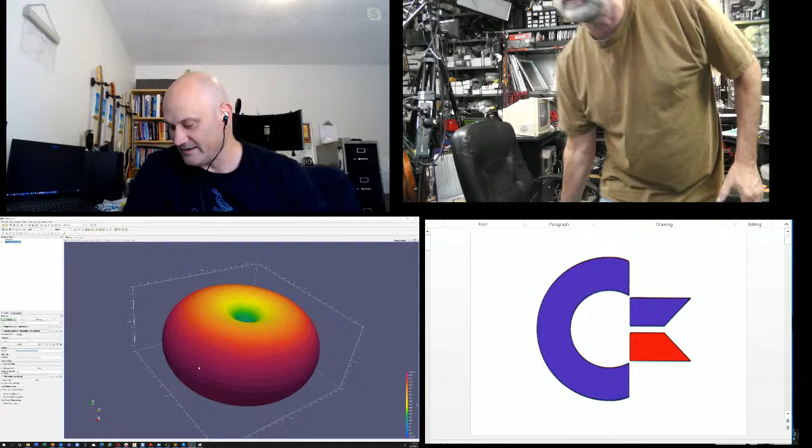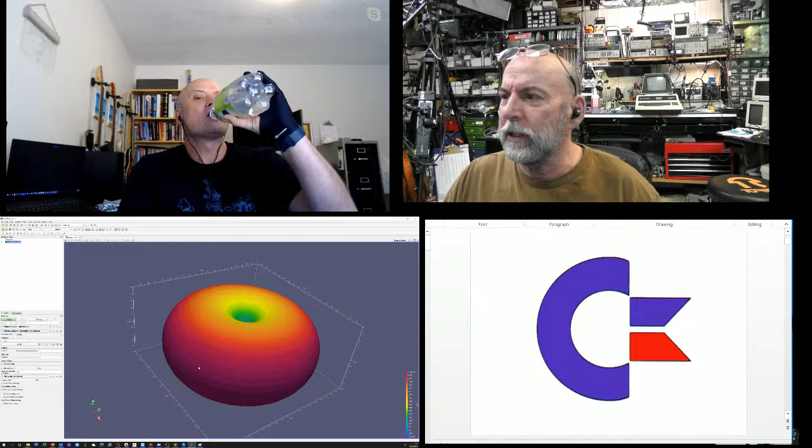Right. I'm trying to remember. They got purchased by Analog Devices, didn't they? Yes, Linear Tech was acquired by Analog. So basically the two biggest, and National was already bought out by TI. We used to have this huge choice of analog sources, and now it's TI or Analog Devices. That's the way industry goes. But Microchip are also one of the big ones on consolidation, and they've been acquiring a few smaller power and other analog ones like Micrel.

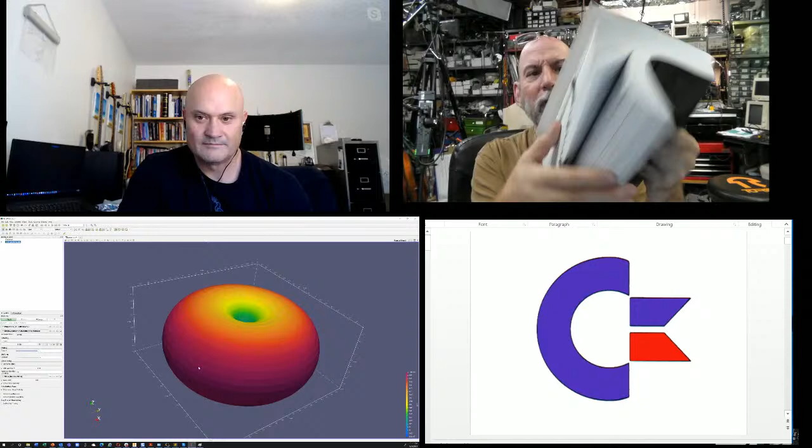So this is Precision Monolithics, PMI. Back in the 70s and 80s, this is what I designed out of to make load cell amplifiers. And look how much information comes with it. This is how I learned analog, reading these things almost cover to cover. And so this book is useless to me, and yet I don't want to throw it away just yet.

Was that back in the days when data sheets were honest? Data sheets came in data books, yeah. And you paid for them. You couldn't just get them for free. I got these for free, but I would tell the distributor to just pull up. They'd show up and their car would be riding low, and they would move their golf clubs and just unload all the data books on me.

So I still have about 600 data books in here. Well, they did that for you, Bill, because you worked for a company buying millions of parts. But if you were just a standalone engineer inventing stuff like me, you had to pull teeth to get data books. I remember wanting to get Philips microcontroller data books for the MCS 51 and MCS 48 derivatives, 8051 and 8048 derivatives.

This was in the 90s when this information started to become available online, but it was still very limited. I couldn't go to philips.com and download every data sheet, they hadn't migrated them all yet. All these companies needed to go through a massive republishing where they put it all in PDF. And the data I wanted was still sold in books, you had to buy them from the distributor. The distributor, if you were buying millions of parts, they would give them to you. But I wasn't.

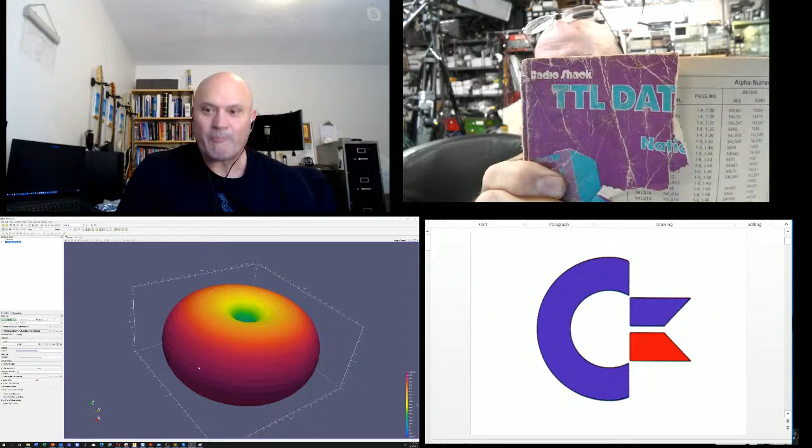Hang on a second. So here's a data book. It's missing its cover, but I bought it. Look where I bought it from - Radio Shack. This is from 1973 or so, and it's the National TTL data book, back when they had pictures on the covers.

Yeah, it looks very well used. It is, and it's written on parchment - you can see the paper's all brown. I have books like that too, my transistor lookup tables, all the standard transistor numbers.

And we would buy books from Dick Smith Electronics in Australia when it was still actually an electronics store. We all lament the acquisition of Dick Smith by Woolworths because we knew it was just going to turn to boring things, and it did.

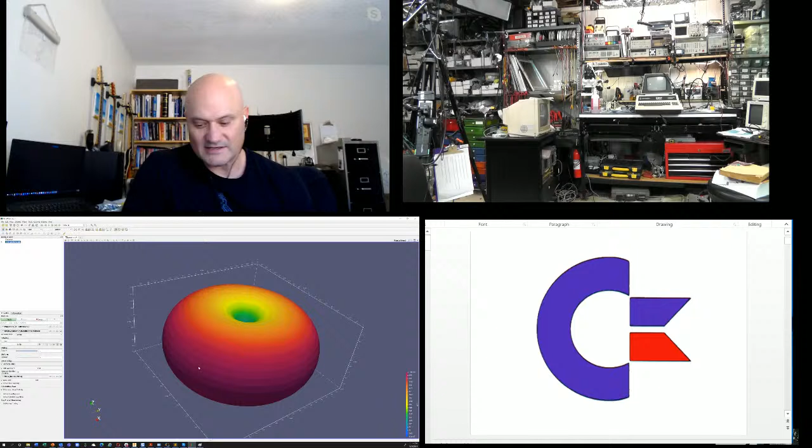But they had, and I'm sure you had them here, Radio Shack had them as well, the transistor equivalency tables. If you needed to replace a part, if you're troubleshooting, it was always on your desk. Oh, this obscure Japanese JFET is not available here, so yeah.

So I have a 3-ring binder of all the transistor lookups. For example, you just saw the RCA series, where they would translate everything to an SK device. So if you needed one, SKs were made by Toshiba in Japan. Here, this was the ECG series - remember that? I was always translating to ECG.

Other than live streaming and novelty, do you ever refer to any of these anymore? No, no. Because I use the internet, right? Of course - this was the internet back then.

Matter of fact, it's even got the old Dymo tape thing on here to tell me which. And then I have another 3-ring binder full of line cards, so that I knew who to go to for each different brand of things.

So, but no, it's funny you mentioned that. I lived and died because I got my start as a kid. There was no maker movement or anything, I fixed things. And to fix things generally meant replacing a transistor, especially audio. So I would get my 2N3054s from Radio Shack for the outputs, those were real common. But if I needed a Class A amplifier or something, I'd end up almost always getting an ECG part or an RCA SK part.

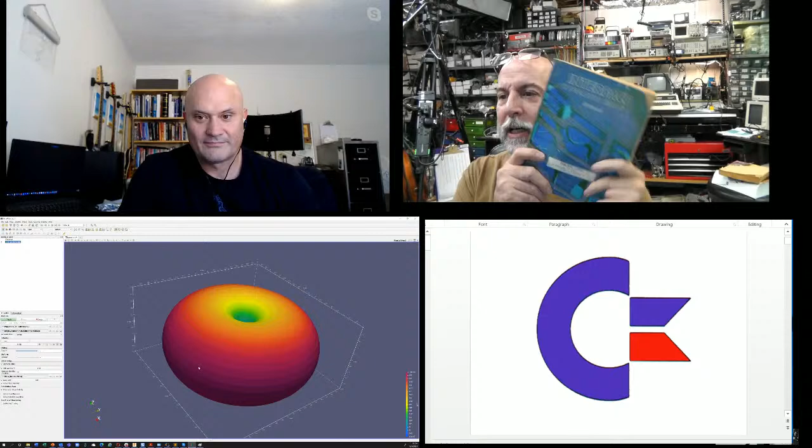I needed to know which of my dozens and dozens and hundreds of data books had the information in it. By the way, there's another National data book with a picture on the cover. But you had to remember where it was. So even when I went on vacation, I would load every nook in the car with data books, and I'd sit there flipping through the pages, just refreshing my memory as to where I'd seen things before. Because it was all about going, that's in a Burr Brown book.

Yeah, what does that tell us when we go on vacation and read data sheets? Oh, I loved it. It told me that I was self-taught, and I worked my way into Commodore by doing stuff like that. Yeah, you did. So I wanted to see what year this one was - 1975 this one came out. So it's 1 year younger than me, Bill.

And not even, because I was born at the end of '74. Anyway, wow, let's see what's going on. They're talking in the chat room.

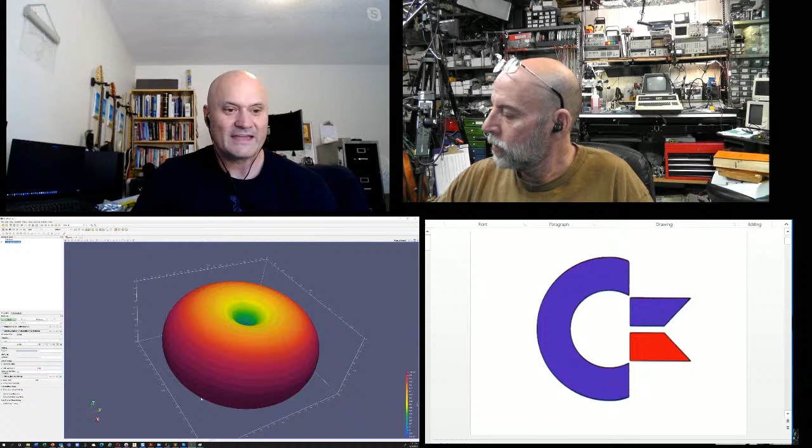OpenEMS uses the Visualization Toolkit, or VTK, and this program you're looking at here is the VTK GUI called ParaView. It's extremely hard to learn, it has too many features - and the reason is it can do anything. It's not just for electromagnetics, it's for any kind of scientific visualization and animation. I really need to spend some time to dive into that and maybe do some dedicated tutorials on YouTube for using this with electromagnetics, because it's quite complicated with all the options.

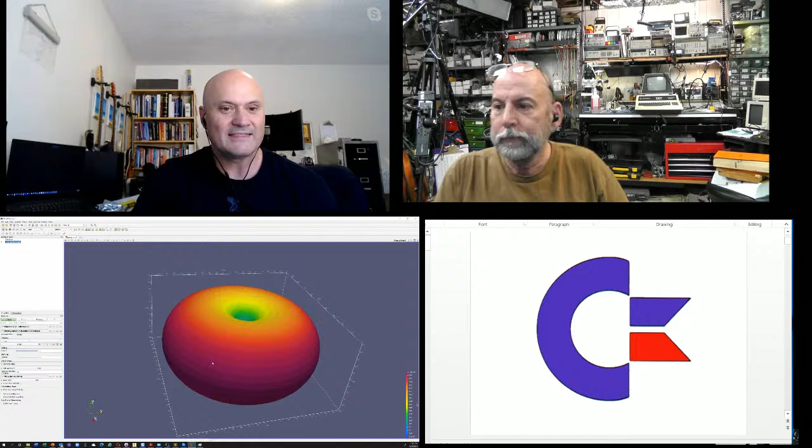But I can get the far-field pattern generated by OpenEMS through the Octave script, running OpenEMS from there, and as an output it generates field patterns and other graphs you can generate as well. I noticed there was a recent update to OpenEMS and to VTK, so I was updating it all and just running one of the basic examples to check that it works.

So what that looks like - normally you start out here in Octave or MATLAB. This one's already generated these graphs, and they didn't come out too good, which probably doesn't matter, but I'll show one of these examples. I've got the editor configured to be my Sublime Text, so here's the infinitesimal dipole script in MATLAB code. I don't know if you can read that text - I'm doing this on my 4K monitor, so forgive me. But basically you just set it up, we're clearing the memory and everything.

Physical constants is just loading an array for storing physical constants, things like drawing units, micrometers. We set up some basic paths and everything. This loading physical constants command executes a separate script that comes with OpenEMS, loading up things like the speed of light, the resistivity of copper, dielectric properties of various materials, and so on, which we refer to throughout the script.

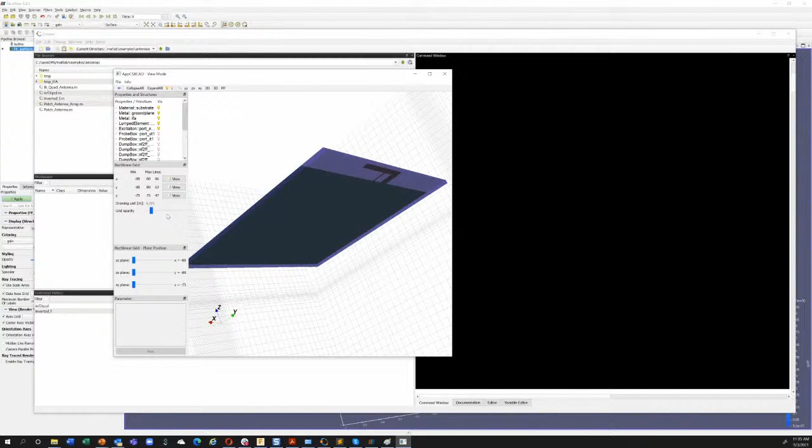And then it opens this other app that comes with OpenEMS that allows you to visualize it. So this is really just a tool for checking what you've written in the MATLAB code or Octave code and visualizing it, just a quick sanity check. Does this look real? But it also shows you, and this is one of the strengths of FDTD, the gridding into a voxel mesh.

So this creates a 3D voxel mesh in the box, and you'll see that where the objects get smaller and more detail is needed, it actually increases the mesh density, or you could say reduces the size of each voxel layer so that you get more accurate simulation. So you can have variable sized mesh in FDTD simulation. Got it. I can exit this, or I could export this if I wanted to.

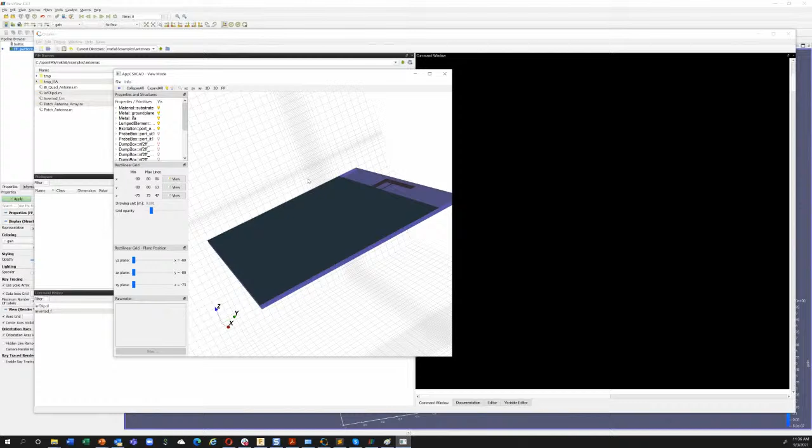Now is the darker blue a ground plane covering up part of the antenna? The semi-transparent blue is the substrate, which is PCB material, FR4, and the teal color is ground plane.

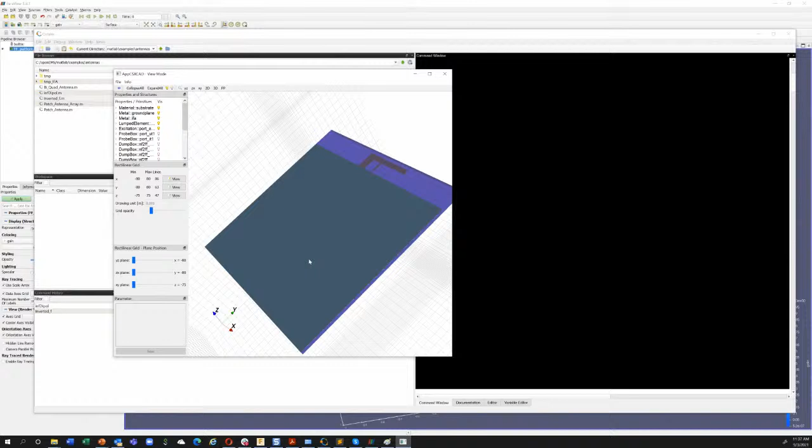Okay. Now, with an antenna, especially a PCB antenna... with a wire antenna, you could do a dipole. You always have two conductors that are driven out of phase, or one of them is a reference for the other one to radiate from. And that's a very, very coarse way of saying it. But for a PCB antenna, you always need some kind of ground reference; it's established that you won't get radiation if you don't have a ground reference. That's like, this is the ground, and the antenna is the thing apart from the ground, and the two together create the radiation.

I used to hang around a radio station when I was young, and it was something like 5 kW effective radiated power. But we were near a river, which improved our ground coupling, and so we were measured as an effective radiated power equivalent to about 20 kW, is my memory. So it was not a magnitude, but it was a huge amount more because of our ground coupling. And I just always remembered that meant that radio signals travel as much through the ground reference as they do through the airwaves.

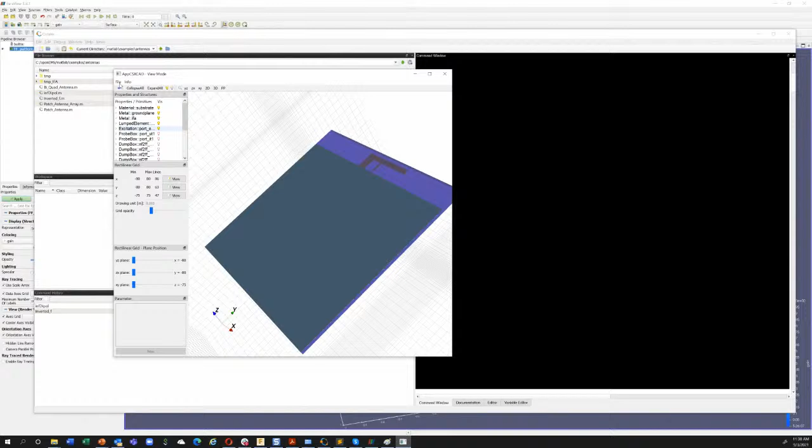Well, it's not even that so much as, to cause radiation, you need charges to be moving, and they need to move in opposition to each other. Right. So in a dipole, you have two quarter wave sticks end to end. So you have a whole half wave. Half wave, right. And you're moving charge out of one up to the other. So you're jiggling electrons up and down the post.

But to do that, you have a drive point in the middle and a differential line, and you're pushing one stick positive while the other's getting pulled negative. And so the current of those is in phase, but the voltage is, well, this one's going positive, this one's going negative, and then it reverses and goes the other way. And you have to have that charge movement and current in order to radiate.

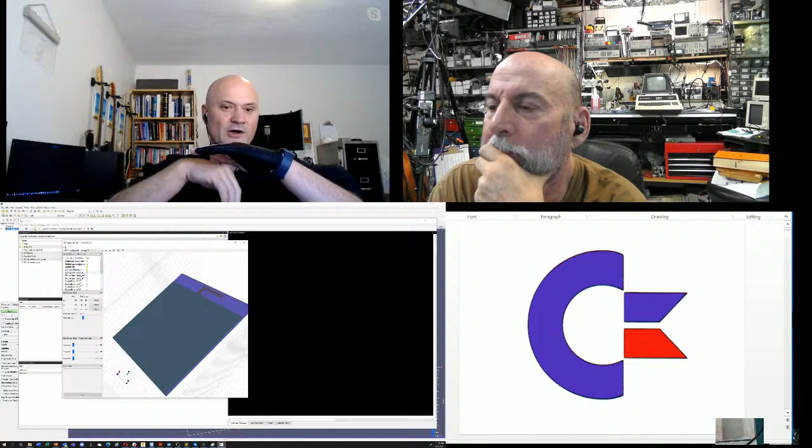And in a monopole antenna, it's a quarter wavelength stick. Right. But instead of having the other stick of the dipole, you have a ground plane be the other half of the wave, right? Because it has this reflective or mirror-like property. It gives you a virtual other opposing quarter wave stick. So you always have a radiator and a ground plane, and it's no different in a PCB. And in this case, we fold the radiator over, and part of the ground plane forms a reflective surface that even gives you a stronger signal in a certain direction.

So let's exit that, and the script keeps running. And now you can see in our output folder, it's generating all these outputs. Here it is. So it's actually executing OpenEMS across multiple cores. And it has this kind of criteria where it keeps looping through the system until the energy in the system has dissipated below a certain level.

And that can be a problem with the FDTD algorithm. One of the drawbacks is if you don't have perfectly matched boundaries, or if you have a structure in your simulation that's very reflective and energy can keep going back and forth for a very long time or forever, your simulation may never end. So you have to have something in your FDTD algorithm that says, you know what, this has been going too long, we're just going to stop.

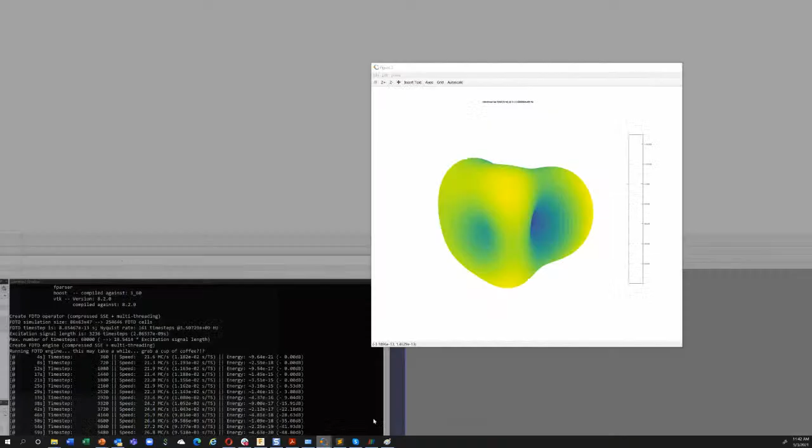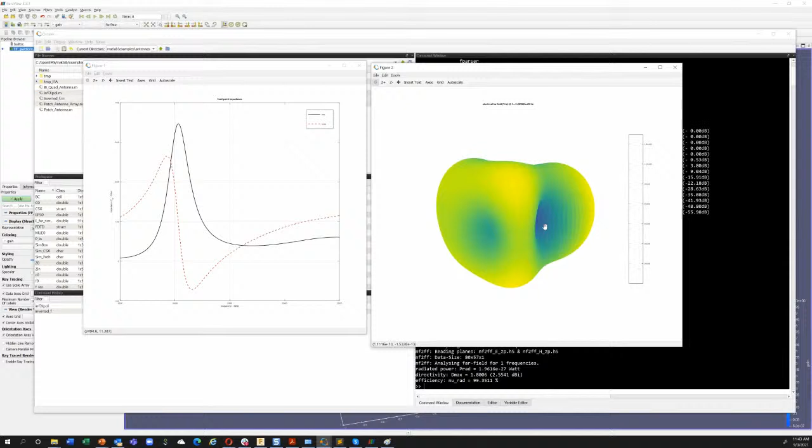Unfortunately, what I don't like is it doesn't overlay the field plot transparently with the actual antenna geometry. Right. I want to see them both to really know, or at least see an XYZ coordinate marker. I've got to figure out how to add that in the Octave scripting. I'm pretty sure it should be possible, but I'd like to see this overlaid with the actual geometry. But I can probably do that in ParaView.

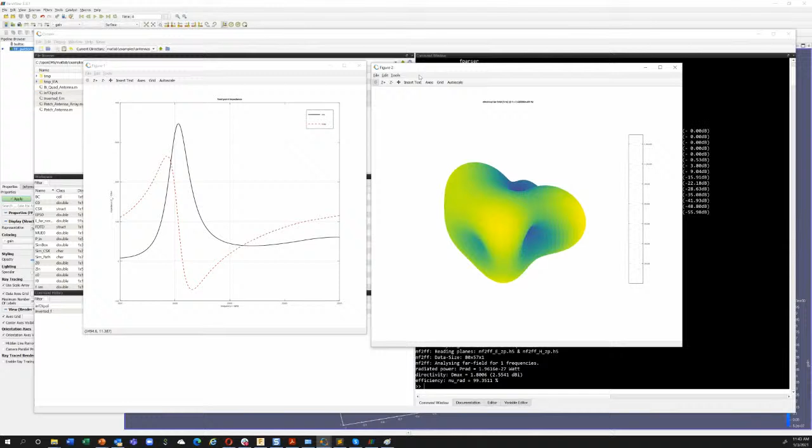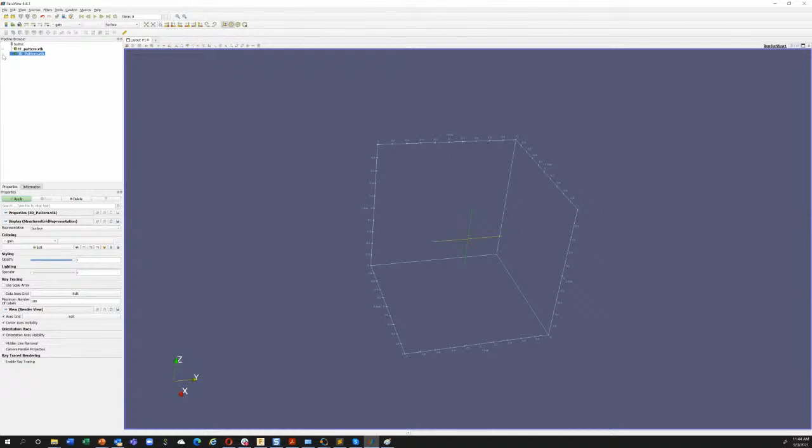Let's see if this one's loadable in ParaView as well. Let me open. I go up one directory. I go IFA. Here it is, 3D pattern VTK. Let's hide that one and display this one. Yeah, so ParaView shows me the XYZ axis. So because I know it's all keeping the same XYZ, I can figure out from that what's my direction on the actual printed circuit board. So I just have to join those dots in my head.

But this is pretty darn awesome for open source. Like, it's hard to use, I get it. But almost every electrical engineer, I think modern graduates, millennials, they know some scripting. Yeah. Most millennials probably haven't used MATLAB. Most of them have probably switched over now to Python. So they might prefer using MEEP. But I don't see why someone couldn't write the exact same thing in Python for OpenEMS. It's just a command line executable that runs, and you pass it an XML file.

Now, here's something interesting I discovered when I was fooling around with, what's it called? Qucs Studio. We've mentioned this on a stream before, and I've played with Qucs Studio before on a stream. But look at this; it's got some Octave stuff embedded in it. It even comes with GNU plot, and the Octave executable, a version of that, is inside the installation of Qucs Studio. So obviously Qucs Studio has some capability to do some Octave stuff behind the scenes. I haven't dived into it, but you can actually execute Octave scripts as part of your simulation model.

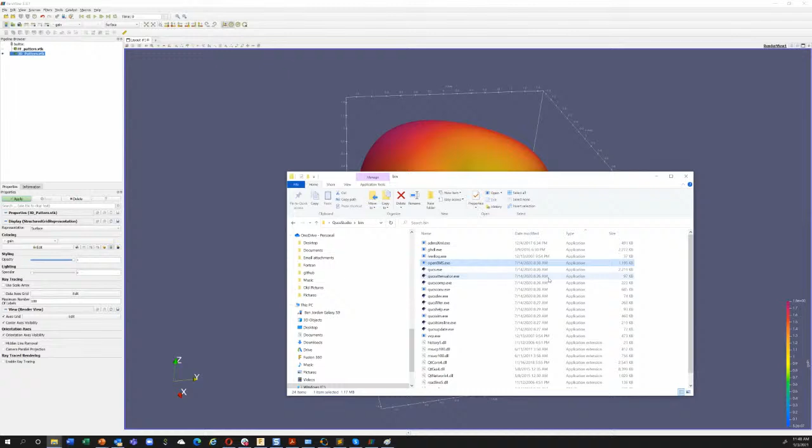You can do it that way, or usually there's a source and a perfectly matched layer bounding box, which is the simplest way to do it. Or you can do a source at each end, which is how most of the professional grade RF simulation tools do it, like HFSS. If it's an antenna, you have one port for an antenna in HFSS. But if you're simulating a transmission line, you put a port at each end, and in your own mind you use one as the origin and the other as the destination. They're both ports and both emit power into the system to generate accurate wave responses.

So, and you think about that, you have to have that in RF simulation, because that's how the software is able to simulate reflection. Right. And so you could do 4 ports in and simulate crosstalk, then, I assume. Yes. Very cool. Yeah. So and this is in lieu of hugely expensive software. This software, ANSYS and software like that, Keysight, whatever, can be hugely expensive.

Yes, they are. But I will tell you this very confidently: I've used ANSYS. They're better. There's a reason why they're expensive. It's because they've invested huge amounts of money and time into building them to be excellent, and it's not just about being accurate. It's about being actually easy to use and very productive. And B, the number of people in the world who need software like this is a very small portion of the overall population. So the return on investment naturally has to be there.

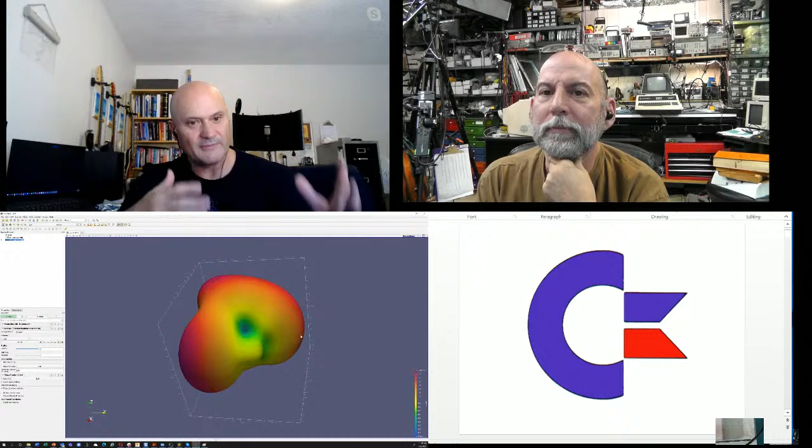But if you can't, then this is not a bad way to start. You'll be frustrated. It's slow. It takes time and effort to set everything up, but it does work. And it's for something that doesn't cost anything, that someone did in their spare time out of the goodness of their heart for all of us. It's actually pretty amazing what the results can be.

Right. Very cool. It's hard to describe it. So yeah, that's what I've been. One of the many things you've been working on. Well, I haven't really. I just brought it up before we started streaming because I thought it would be interesting for us to talk about it. Yeah. Oh, it was. I loved it. So, any comments on any of this? I'm just curious on the Discord. I don't have it open right this second.

Someone says ANSYS has a student license for electronic simulators, but it's quite limited. Ellie Fidesz said that. Okay. Well, I'm not a student, so I can't get that. I know that AWR, which used to be owned by National Instruments and they sold it off to Cadence, had a free version for licensed radio ham operators. And I think as soon as Cadence acquired AWR, they nixed it. Because I went and had a look on the website and I could find no information about getting it for free as a licensed ham operator.

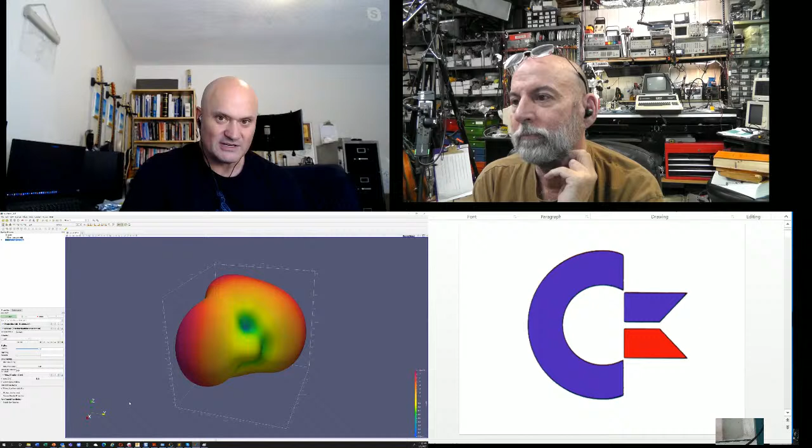Right. And another comment was Mike Fikes had said, yeah, MATLAB and Octave can do complex matrices. That was when you were talking about the complex matrix interfaces and stuff. Octave is extremely mature and powerful, and it is more than 80% compatible with MATLAB code. And there's even a whole lot of toolboxes that people have written for Octave that mirror MATLAB toolboxes. Some of those become a bit more divergent, but for the most part, it's extremely powerful. And if you ever used MATLAB in college, you can use Octave. But of course, if you're a professional engineer working for a company that has a tools budget, you could probably get the MATLAB. Right. So very cool.

Well, thank you for showing all that. Boy, that one drawing looks almost obscene the way it's facing us, though. Here, there you go. Yeah, it's like a pinch. What does it make me think of? Like those squishies we used to give away at trade show booths for stress relief, made of that closed cell foam, and you just squish them real hard, and then they gradually open back out again.

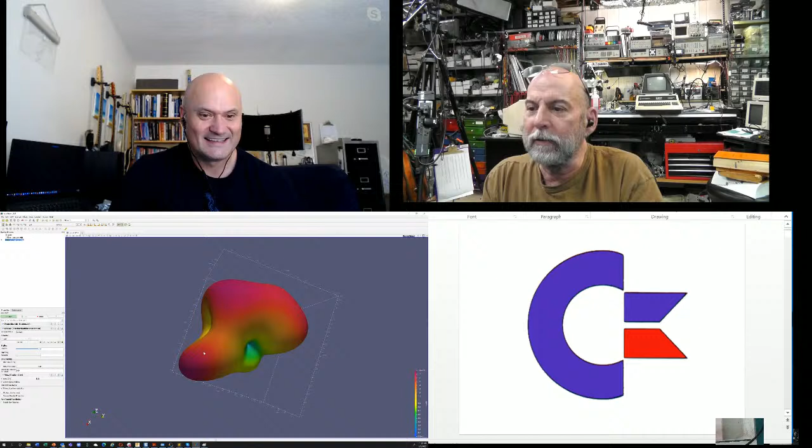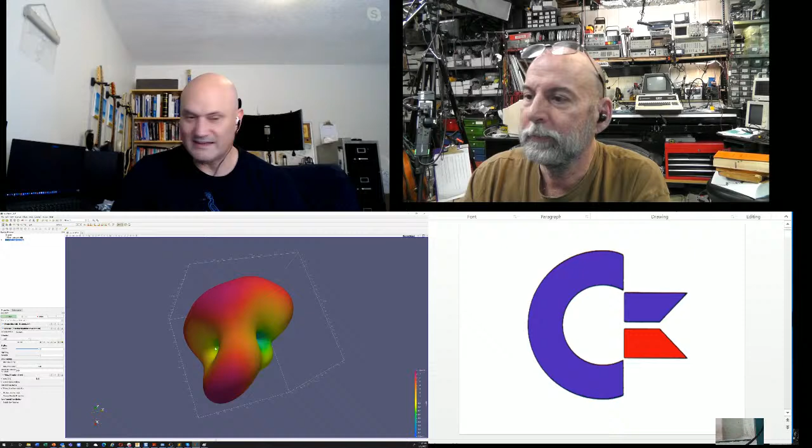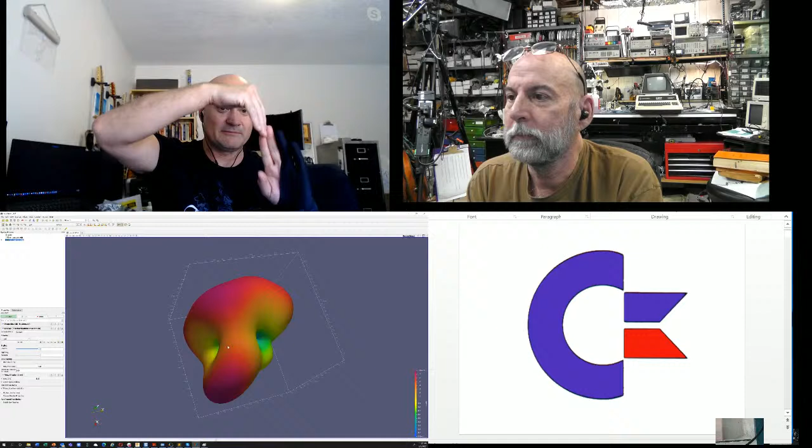Well, I would not have guessed that was the radiation pattern of a meandering F antenna. So I learned something today about that. Yeah, and the reason is that these nodes where there's basically zero signal is where either you're facing more into the ground plane, or you're facing into the grounded end of the matching inductor portion of the F. The top of the F connects to the ground plane and forms a loop which gives an inductance that makes the radiating arm more resonant at the frequency that you want it at. So yeah, makes it electrically longer, you could say.

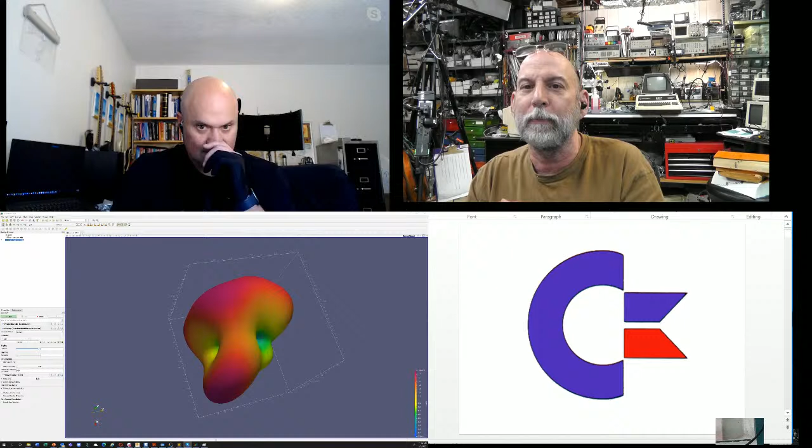So you were talking about Python, and I was going to say I have a story. Before we went live, I was talking about Terry Ryan, who wrote the BASIC that was used in the Commodore 128. Terry's background was he made BASIC structured. He had loop while, loop until, do while, all these commands, and he got in trouble for doing it. The boss literally said, while it turns out you were right to include these commands, nonetheless, you went against my wishes, so therefore no big raise for you. So this is how life treats Terry Ryan, right?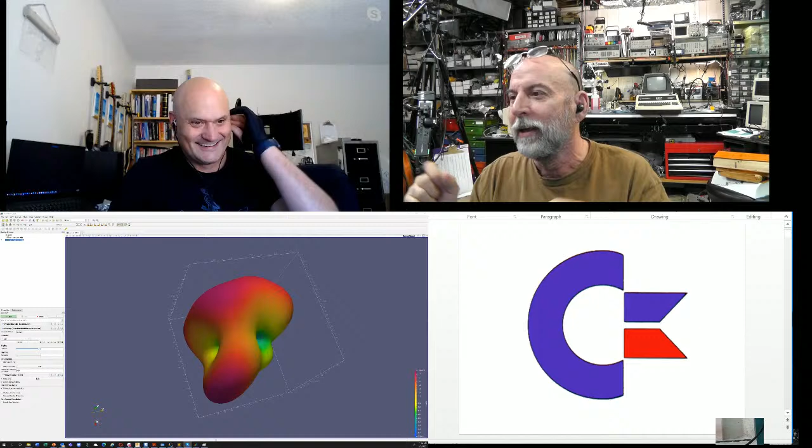So I asked him one time about Python, because you mentioned Python. I'm like, Terry, what do you think of Python? And he gets quiet, and he goes, white space has value, man. I'm like, what? He's like, it matters. You have to use a tab or a space. It means something. They used white spaces as syntax. Which is funny because he'd spent half his life making white space mean nothing at all, right? And it reminded me of the old Cheech and Chong album where he's kicking the piano, man. White space means something. Yeah, I think that would trap me too. I would find that very frustrating.

Well, the only time I had to use white space was, I started an ISP and ran it for 15 years, and I used SendMail. And SendMail's syntax literally needs a tab. If you have 5 spaces instead of a tab, it doesn't mean the same thing. When it didn't work, you had to go through and find out if something that didn't look like a tab was a tab or wasn't when it should have been. And you're using VI editors and stuff. Oh my God, yeah. Pain.

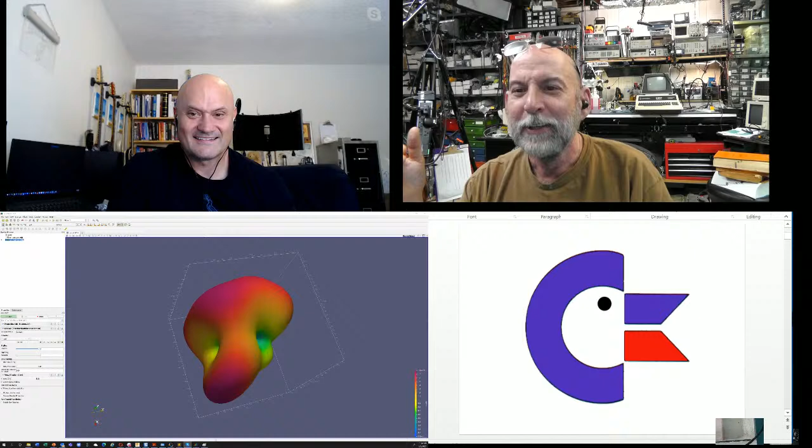By the way, I was watching Marvel movie outtakes, and there was that scene where they tell Dr. Banner, 'Hey, you'll like it, Doc, we have all the toys.' In the unused scene, he says, 'What, like a Commodore 64?' So the Commodore 64 almost made it into the Marvel movies, but it didn't. I love it - the reason it didn't is because Commodore isn't around anymore.

The chicken has died, as we say - the chicken can no longer sponsor the movie. I love that with the Plus, though. Well, I had somebody tell me - he literally screamed on the chat channel - he said, 'I can't unsee that now that I've seen it,' the Commodore logo.

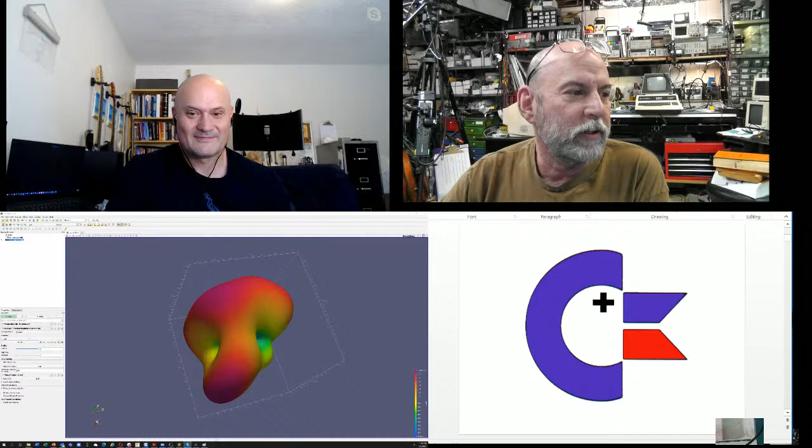I was actually going to show from my trip inside of MOS that I took 3 years ago, actually longer now. It looks very dangerous in there, leaks everywhere, water - yeah, it was cool, little campfires and stuff, bad chemicals, stalactites - well, there were calcium stalagmites sitting right next to where somebody had gone to the bathroom. It was pretty wicked.

Well Ben, my friend, it was great learning about these open source tools. I wish my brain worked well enough that I could just sit down and emulate what you just showed us today, but I know I wouldn't be able to. This is just one of the scripts - the author of OpenEMS, Thorsten Liebig, is a lecturer at a university in Germany, and this is just one of his own examples he put together. So you could do what I just did pretty easily.

I put almost no effort into this. I just opened it up before we started because I'd updated the software and wanted to test it, see if the update broke anything. But yeah, cool, all fun.

So once again, we didn't talk about bootstrapping JFETs, but we were ready - so that might be what we talk about next week.